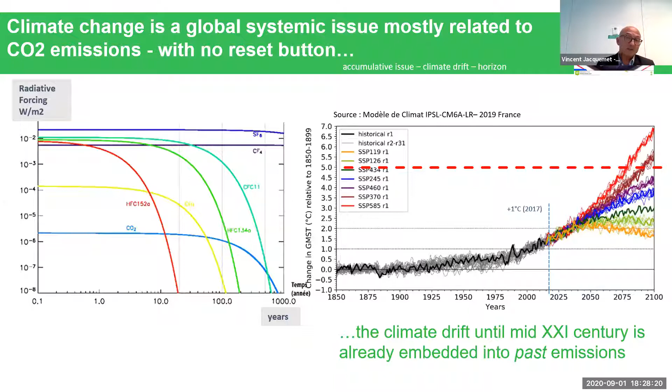When we commit on climate change, plus 1.5 degrees, plus 2 degrees, it's already a given. When you look at the different scenarios, shown on the right-hand side, most of them already converge to this temperature increase by 2040, 2050. This is the drama of the horizon: the actions we cannot take today. If we stop emissions today, we will only start to see benefits after decades. This is why it has taken a lot of time to increase global consciousness about this climate drift. But obviously COVID has accelerated this phenomenon.

Let's take a final look at the consequences of a few degrees more. On the left is a map of Europe about 20,000 years ago. As you can see, the sea level was 120 meters lower than it is today. That water was just stored in the form of an ice shelf on top of Scandinavia and Scotland, a 3,000 meter thick ice shelf. There was no temperate climate at all in Europe.

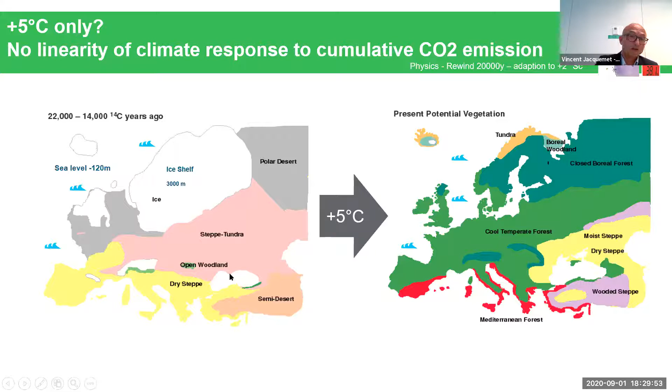So you can imagine what that represents, and this happened over 20,000 years. Just imagine if we get a few degrees more in just 100 years. This is a massive, massive change, a massive impact. It is commonly agreed today that a change above plus 2 degrees during the century would be something very hard to manage from an adaptation standpoint, for our social systems, economic systems, for our companies, and for us and our people.

So I'll stop here, just saying that this energy climate challenge has been taken very seriously by our company, Schneider Electric. For years we have been taking commitments, reporting on our sustainability strategy and the improvements we make.

Just a few words in a nutshell: we are a big global company, doing about 27 billion in revenues last year, plus 40% in different new and emerging economies. We're more than 100,000 people, and we have mainly two businesses. The first refers to energy management systems, and the second is about industrial automation and industrial software as well.

As I was saying, we are taking very serious commitments on sustainability. We have engaged actions to be neutral in our operations on scope 1 and 2 by 2030, and we have taken the commitment to have a net zero CO2 supply chain by 2050.

So our mission, basically, for our oil and gas clients is to help them in this transition towards more sustainable operations. How do we do this? We do this with our EcoStruxure set of offerings for oil and gas, comprising 3 levels, from the connected product to the edge control systems, and the applications and software.

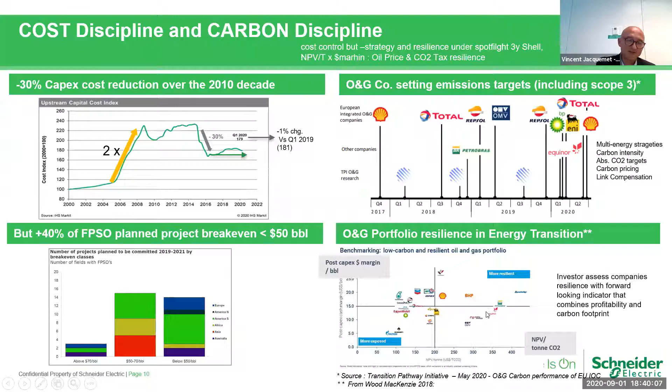Energy transition: so what's happening basically today? The major oil and gas companies are engaging into two main transitions: one is going for greener businesses, and the second for greener operations. Just for illustration, on greener businesses, very recently BP announced that they would engage investments to reach 40% of their business into new energies, and they will drive their capex towards those new energies.

Greener operations, we talk mainly about scope 1 and 2 GHG emissions, and this is very much consistent with SDG number 13 around climate action. So how are those companies going to undertake those two transitions? By putting together different initiatives in terms of decarbonization, energy efficiency, and electrification. Most of these technologies exist at different stages of maturity, but the good thing is many of them already exist.

Today, I will really focus on those scope 1 and 2 emissions, dealing with how we can optimize the designs, how we can improve energy efficiency during the operations, and we'll deal with the digital aspect of it. Because actually, it's like the challenge in digital transformation. Technology is one thing, but the transformation is another challenge.

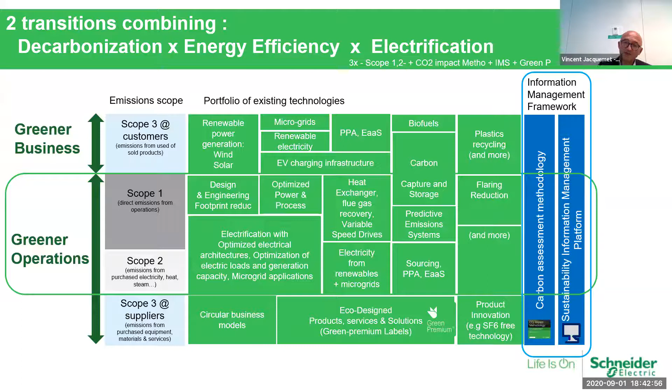And we can tell our customers, hey, look, by utilizing our technologies, you'll make that kind of savings. You have a footprint by using it, obviously, but you'll make those savings. And the second pillar of this information management framework is obviously the platform, the data and the information platform that is needed to make it.

Just a word on electrification. So most of us know that Norway is kind of a benchmark when it comes to CO2 intensity, in terms of kilograms of CO2 by barrel on the offshore. Norway is that benchmark with 7 kilos by barrel on average.

But it comes from a long history, actually. In Norway, flaring was banned in the 70s. A carbon tax scheme has been implemented in the early 90s, and Norway has already engaged programs such that 50% of its production is set to run on power from the shore.

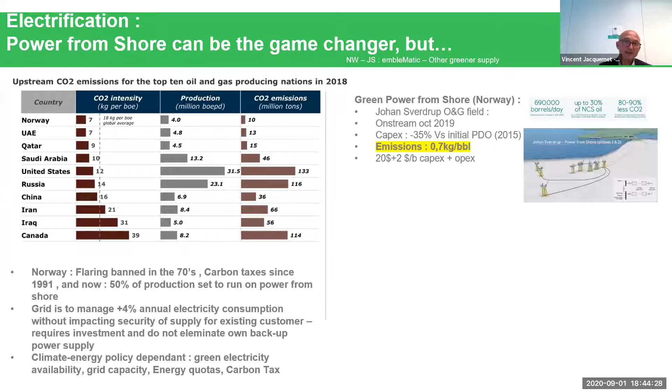And here we have a kind of emblematic example with the Johan Sverdrup offshore field, which is powered from the shore. And today the emissions are less than 1 kilogram per barrel, with quite low costs on the capex cycle and the opex cycle, as you could see. So at the end of the day, bottom line, they have reduced emissions by 80 to 90% in this field.

But there are other ways to electrify and to reduce emissions in the field. Another way, again it is in Norway, is to mention the wind farm that has been decided and implemented, and that should come on stream in 2022, I think, and which will power different platforms in the North Sea, but only meeting a third of the energy needs of those platforms.

So it will complement the operations in terms of energy supply, but still will reduce emissions and will reduce actually the tax burden attached to those emissions as well. So that's a very good deal, both from a business perspective and from an environment perspective.

Another way to reduce emissions, while looking at getting some economies of scale in the energy we're using, is to create floating concentrated power hubs. So studies have been made in Brazil, and they seem quite promising, showing economies in the range of 25 to 30% in terms of CO2 emission reduction.

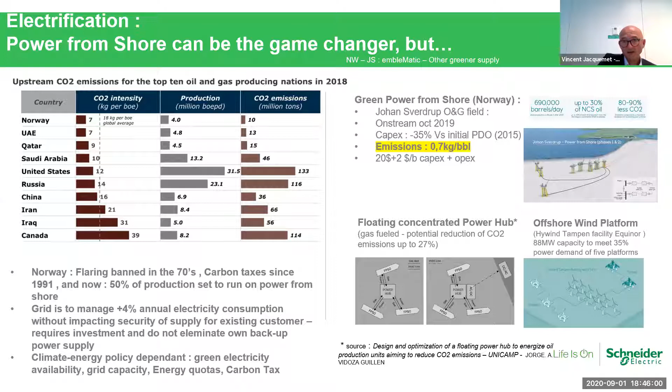So that was for electrification. Another set of initiatives is around energy efficiency. Here, I'm going to talk about variable speed drives, quite basic, very well-known technology today, and just a basic kind of application to drive energy efficiency, energy savings, CO2 emissions savings as well in the operation.

We know that technology, I think the point is to say that by implementing drives, you also put in place the system that will allow you to collect some data that will give you better control and better management of your operations. So there is also a kind of digital advantage in implementing this, because you get better informed on your operations and you can start engaging into kind of predictive maintenance applications by having these functionalities.

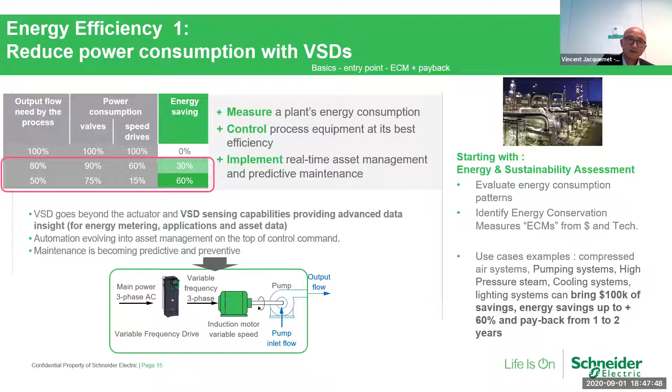And to start with, we have that experience. One of our divisions is engaged in energy and sustainability services. So you do some audit, you identify the most valuable energy conservation measures, and you implement. What's interesting is you usually have very short paybacks, around 1 to 2 years, and you can save hundreds of thousands of dollars and reduce energy up to 60% plus, depending obviously on the use case. So that's one of the basics in terms of efficiency.

Another one, quite well known, and I think this deserves more attention, especially as it allows to rethink the designs and the power architectures of our FPSOs and upstream assets, and to optimize them from design, by really considering energy architectures which are fit for purpose for the process and meet the process requirements, and really design the most effective power systems for the need of the processes.

So you do this by decreasing the voltage, by decreasing the short circuit currents. At the end of the day, we have been able to demonstrate that savings can be up to 45% in terms of size, in terms of footprint of the electrical system, and we can reduce its cost by 20% and reduce the subsequent emissions, obviously, of the system.

So the point is, you need to engage this very early, obviously, when starting the very early design engineering studies of your project, and it has to be collaborative. I mean, and this is the way we want to engage with our customers.

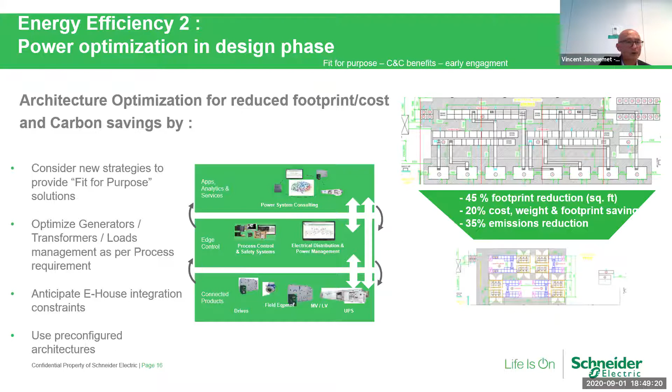Another initiative in terms of energy efficiency is to put together the view of the different disciplines on your operations. This picture shows the control panel for a plant where you have together the process information, the energy information, and the asset management information, so that whatever happens in your operations, you can directly access the equipment and the process data. You can run some simulation, and at the end of the day, prevent any downgrades or failures.

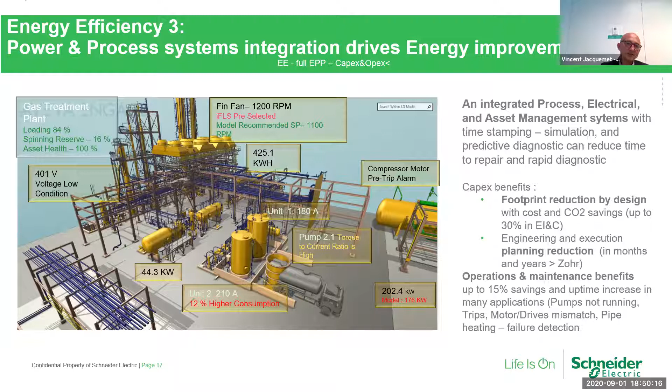And have then a better control of your operations. At the same time, by putting those two systems together, you'll find some savings when designing the solution, and you'll find savings while in operations as well. So that's it for the energy efficiency solutions I wanted to share with you.

I'll move to the next topic, which is about digital and the digital transformation. I found this quote from Bill Gates, and the point is to say it's really about questioning ourselves what drives the value in our operations. Digitalization in that perspective is only the means.

What's valuable is the information, and what makes you different from another one is the way you manage that information. So information is really at the heart of the value we are extracting from our businesses. We know that, but I make the point because many times, over their digital transformation journeys, companies have maybe not put enough effort, time, resources, or thought into what it was they wanted to achieve. So the point is, how do you make all that information useful, actionable? And that's the journey we have to start.

We have to start in each and every business we have, because there are so many data everywhere, different data formats, structures, volumes. We have to make sense of that data, put it into context, make it consistent in the way we relate it to each other in terms of the objectives it serves, and the way it is managed in the operations through different processes we have.

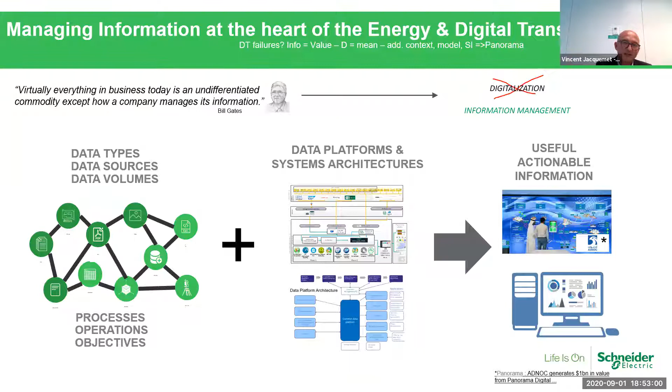I pasted a picture about the ADNOC Panorama Command Center, which is one of the most exciting experiences we've had with our customers. I really encourage you to have a look at what they said recently in terms of how they are benefiting from having set up this information system, and today how they can leverage it to improve their operations.

And as we were talking about sustainability and digital, that's exactly about the same. The point is, we have to build trust towards our environment and toward the investors on what we are doing. So they have to trust our reports. Our reports have to rely on standard, recognized methodologies and indicators, because our strategies are under more and more scrutiny.

As I said before, you have organizations like the Transition Pathway Initiative, which benchmarks the commitments taken by our oil and gas companies and makes recommendations on that. Then you have to work all the way back, looking at: what are our commitments? How should I report on those commitments? What are the tools I need to manage my energy and sustainability commitments in the different use cases?

I have to produce my reporting. I have to increase my energy efficiency. I have to better purchase or manage my energy across my different sites. I have to identify those energy conservation measures that will help me. So where is all that data?

That data is in different systems, some of it manual. So you have to organize and orchestrate the entire collection of that data to make sure you will really be able to leverage all that data and information and make it useful for the purpose of validating and improving your sustainability strategy.

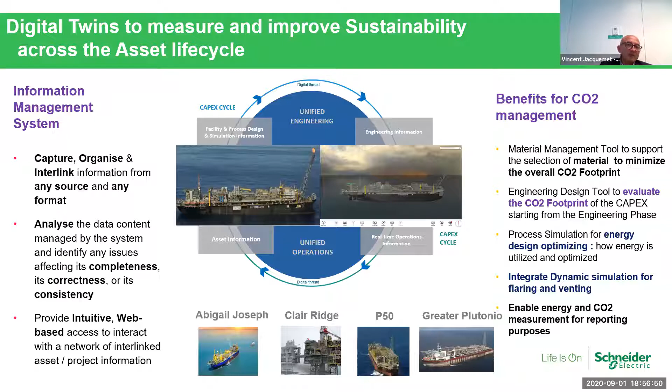So that's really digitally enabling your sustainability strategy across the life cycle of your assets. I want to take an example, like we commented on last year. It was just the beginning of this FPSO digital twin in South America with Petrobras.

So they built the digital 3D model on the topside for three key processes, and then started to implement advanced cases in terms of predictive maintenance, in terms of connecting the workers and supporting them with technology during the maintenance operations. And this phase 1 has been completed.

And there were some interesting key learnings that were reported by Petrobras on this digital twin experience. They recognized that there wasn't a huge upfront investment required to start building this digital twin. Also, it was a significant piece of work to collect the different engineering data about the FPSO, and this is a common thing.

While starting those digital twin initiatives, at the end of the day there is some investment needed to put the data together. Having in mind that laser scanning can be leveraged to complement those pieces of data, that's one thing as well.

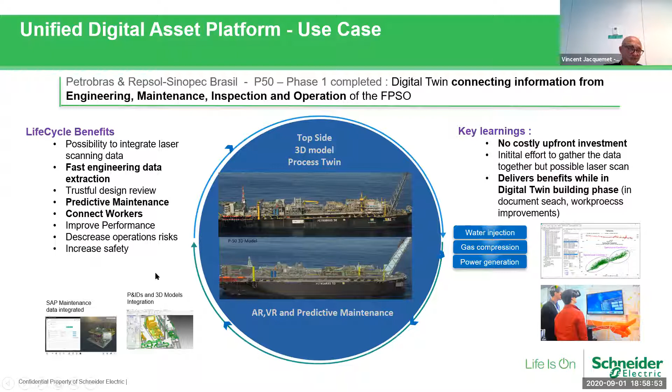Another digital initiative I want to mention is about Vincent—we're running out of time. That's my last slide, Dave. Okay, okay, thank you.

This is an initiative we launched with AVEVA and Doris Engineering last year. We started last year and launched it this year to accelerate the digital twin within the market. We already started to work and have identified different use cases we want to bring to the market.

And this is an answer to one of the conclusions of the FPSO Congress last year. I think everybody recognizes that more collaboration is needed, and this is a way for us to engage into it. We're happy to discuss this.

So I will conclude then, Dave. I think in the previous presentation we had the question, how far and how fast are we going into this digital transformation? Frankly speaking, I don't know. I think maturity is globally increasing, but it's very hard to say.

What is for sure is that for sustainability, we have to accelerate now, and we have to deliver now. Electrification sets a very interesting benchmark for the industry. We're seeing the example in Norway. There are existing energy carbon efficiency measures from existing technologies and expertise in terms of optimization of the power and process design that can be leveraged very early on the project, and that can even be implemented while redesigning assets.

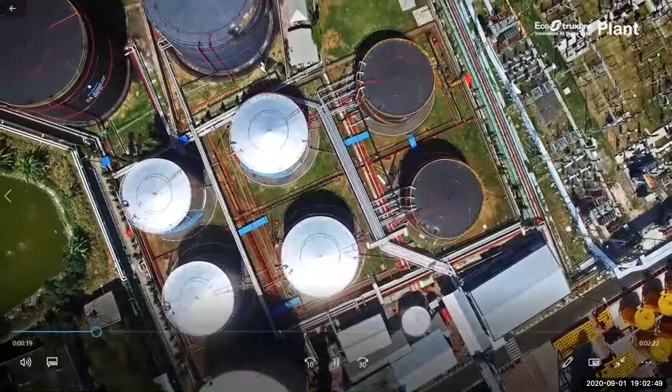Any shutdown in operations could impact production output. Unplanned downtime at a strategic production facility could create a serious flow-on effect with a major economic impact. Or worse, an incident could also come at devastating human and environmental cost. In this context, managing a plant has never been more demanding.

Managing operational risks with confidence is key to ensuring greater safety of people, production, and profit. EcoStruxure Plant, Schneider Electric's open IoT-enabled architecture, makes the job easier. It helps drive measurable operational profitability improvements safely. Using analytics and Schneider Electric's real-time accounting approach, EcoStruxure Plant helps you control and measure risks in real time, automatically or manually, and provides your employees with tools that empower them to become performance managers.

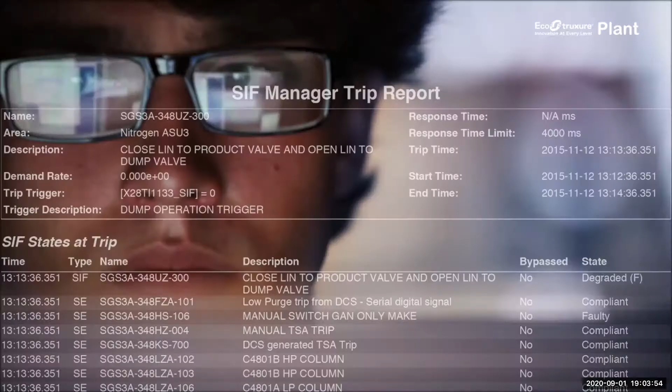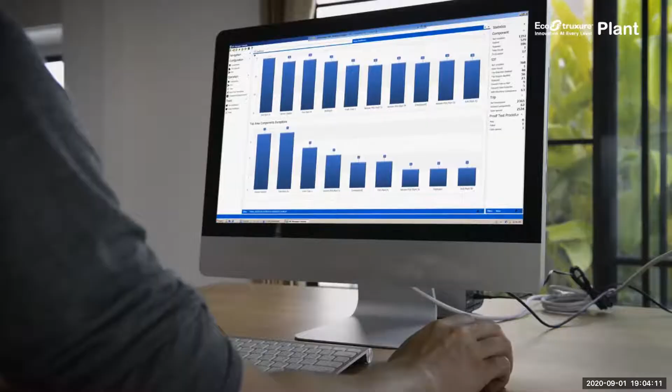For example, EcoStruxure Triconex safety systems automatically send your maintenance manager easy-to-understand alerts through their Safety Instrumented Functions Manager software. These alerts include possible causes and solutions to abnormal conditions, so issues are addressed before an incident occurs.

These and other tools provided by EcoStruxure Plant help your workforce understand the impact of their decisions on overall efficiency, reliability, and safety risks, which helps you make your operations more efficient, more reliable, safer, and more profitable.

With connected products, edge control, and apps, analytics, and services, EcoStruxure Plant enables the scalable design and operation of connected systems with best-in-class cybersecurity built in at each layer. That's innovation at every level.

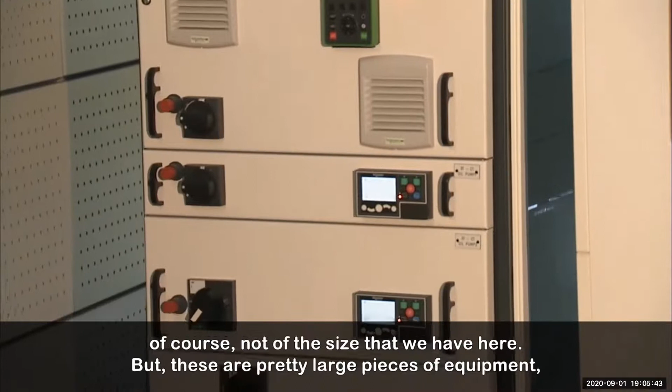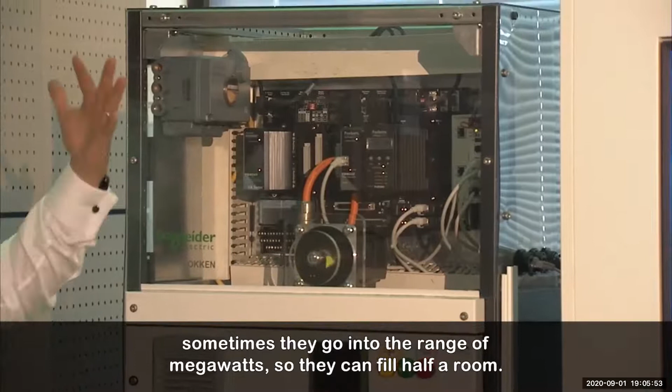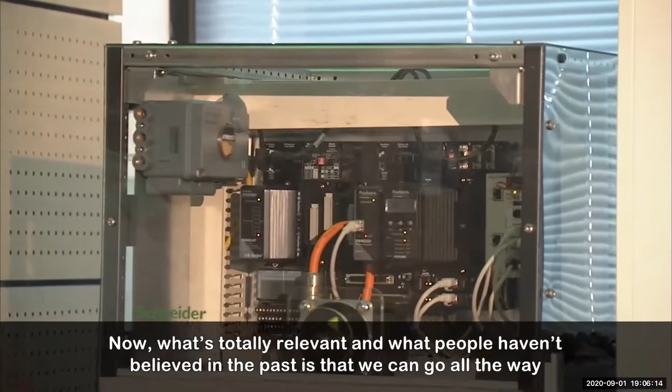And they are, of course, connected to the DCS system that you see up here, which may be in the same or maybe in an adjacent room. Now, what's totally relevant, and what people haven't believed in the past, is that we can go all the way from the electrical equipment and the motors into the DCS system. And the DCS system you would see in the control room here, and that's where the people operate the plant.

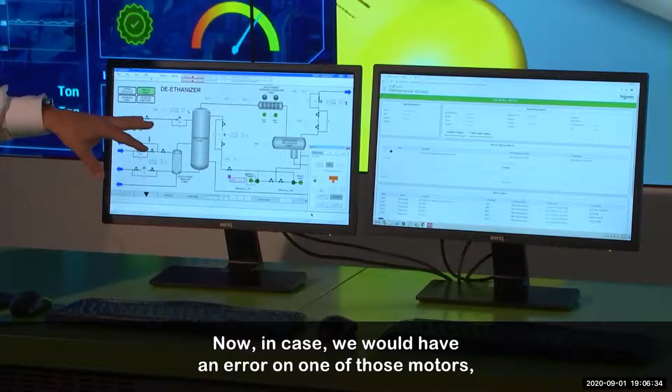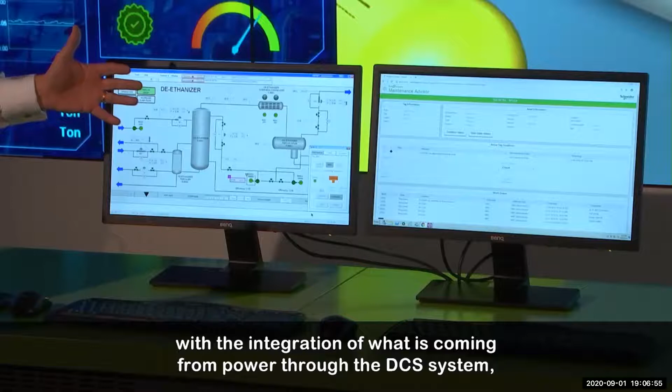Now, in case we would have an error on one of those motors, then usually this is where the panic breaks out and people want to make sure that they keep the plant under control. And this has been extremely simplified with the integration, coming from power through the DCS system or the process control system now to the software, because if they look at the error here, they can see the error is at a pump. And then one could immediately look at the 3D model of the plant, and that's where AVEVA comes in.

Yeah, and so we're in a de-ethanizer. We're in a pump that's involved in the flow of the feedstock into and out of that de-ethanizer. And so now we want to go from this operational view. We know there's a problem with the pump. So now look at how that looks from the capital view.

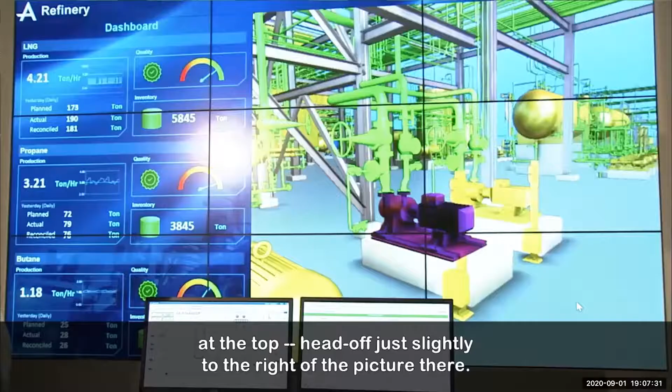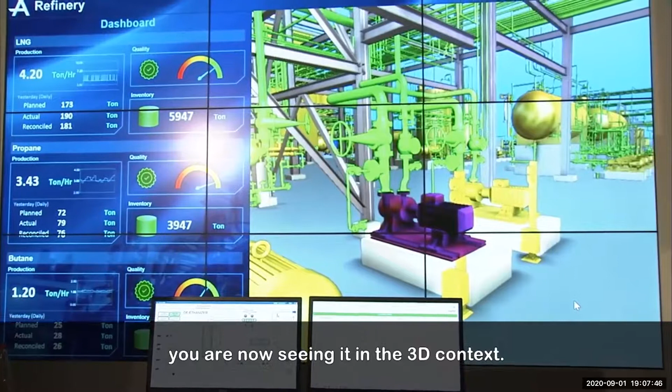So maybe if we can just look to the 3D display at the top, ahead and slightly to the right of the picture there, you'll see this 3D view, and that is the asset view. You're now looking at that same pump that you saw in a 2D schematic. You're now seeing it in the context of the electrical control system, in the 3D context. So now you're able to switch from the operational view to the design view, which would be really important if now you needed to do something with that pump to correct it.

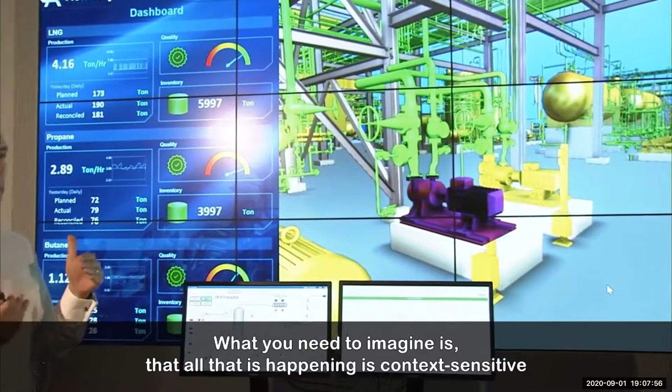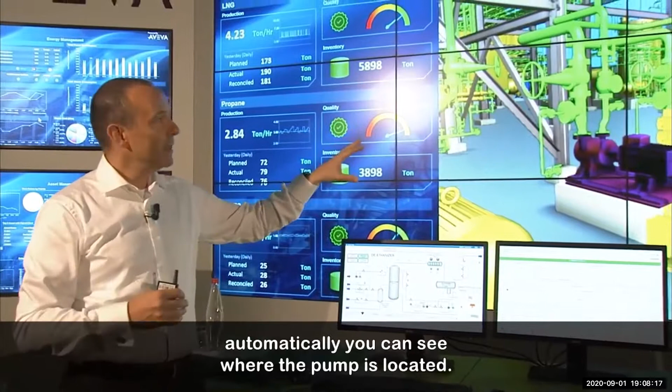And what you need to imagine is that this is all happening context sensitive, and that's the change from the past, and that's the clear advantage of being totally integrated. So on the process control system, you go with your cursor to the pump, and then on the 3D model, automatically you can see where that pump is located. Now you see that in such a plant you would have a certain redundancy.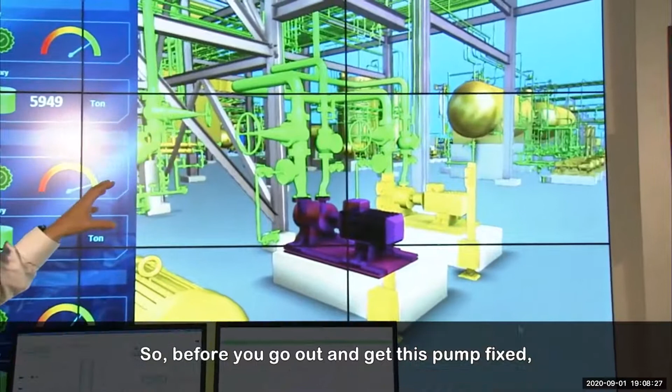That means if one pump fails, you have another pump there. So before you go out and get this pump fixed, you want to understand what's the performance of the second pump. Is that going to be potentially failing in the future? And that's where you would call, in a larger plant, the so-called reliability center.

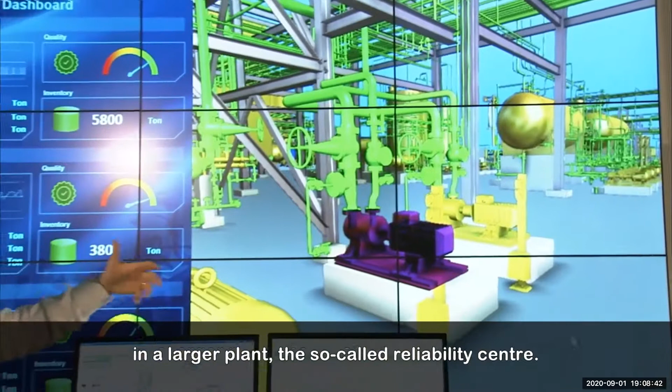In the reliability center, we have quite a bit of AVEVA software running, for example our asset performance management suite of products. Craig will explain what we can do with that.

So this idea of asset performance management - when you have downtime, it's okay as long as it was planned. You don't want it to be unplanned, that's very expensive. So in this situation, we know there's a pump, we know it has an issue, and we're about to switch over to a second pump.

Now, of course, we want to look at the information around that second pump to be sure it's going to be reliable. It turns out we've been capturing all the operational data of that pump over a long period of time, and based on that we can predict when it would fail or not fail in the future using artificial intelligence and machine learning. So we're able to look at that before we actually activate the switchover to the backup.

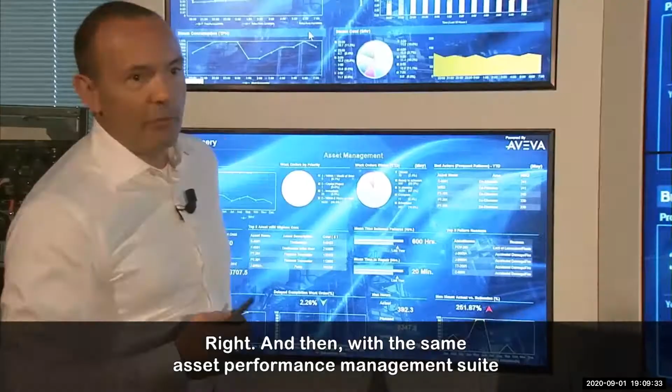Right, and then with the same asset performance management suite, you would actually send out the service engineer. He will get his work order, he will look at his mobile device, and he will have all the data plus the 3D model, everything on his mobile device as he does the service on site.

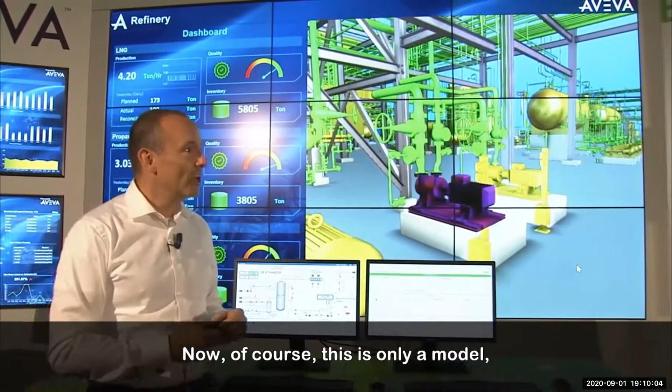Now, what you also could do prior or after the service, you can calculate with our profit advisor automatically what's the profit impact for the company or for the plant. Now, I understand, of course, this is only a model, so let's see how that could look like at the customer side.

We've talked before about Abu Dhabi National Oil Company, or ADNOC, and we've talked before about how in 8 weeks we were able to deliver Schneider Electric and AVEVA software together. Can we have the slide?

So they're very proud of it, and we're very proud of it. This formed what ADNOC now calls Oil and Gas 4.0, as part of their digital transformation.

Now, I want to come back to - the customer says, well, this is great, now how can I drive productivity improvement? We've gone in with that account team, that coverage model we described earlier, and we worked with them around two scenarios. First, asset performance management, which we just talked about - looking at a certain asset class, predicting when it's going to fail before it fails, a dramatic improvement in productivity.

And secondly is optimizing the feedstock - looking at the sulfur content of oil coming out of the ground, optimizing where that gets routed to the refinery capacity, to the storage facility, to the vessels at sea, to the spot market prices. Every optimization in this end-to-end point, by ADNOC's words, is over $50 million of economic value generated. And we're just getting started with ADNOC.

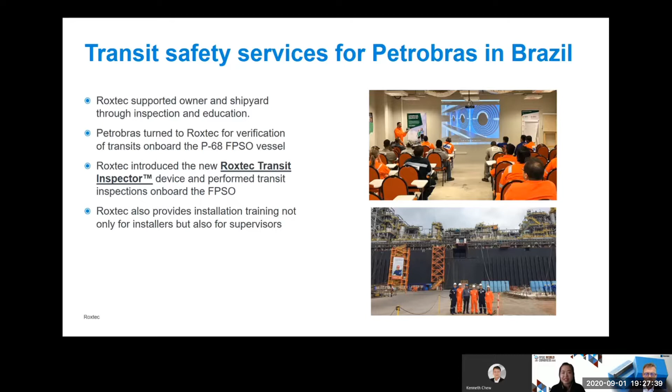Thank you, Morten. And if I can just ask you to summarize your thoughts about Roxtec in general and how you guys can actually help the FPSO industry, what will your thoughts be?

Of course. So as a summary, as mentioned, we believe that a digital protocol that complies and supports throughout life is very key. And I think we've proven that during the COVID-19 pandemic, that it is basically key to have something that operates no matter what is happening around you, your surroundings. And then obviously the innovation, not only products, but systems as a whole - we definitely need to take this to the next level of electrical safety, so to speak.

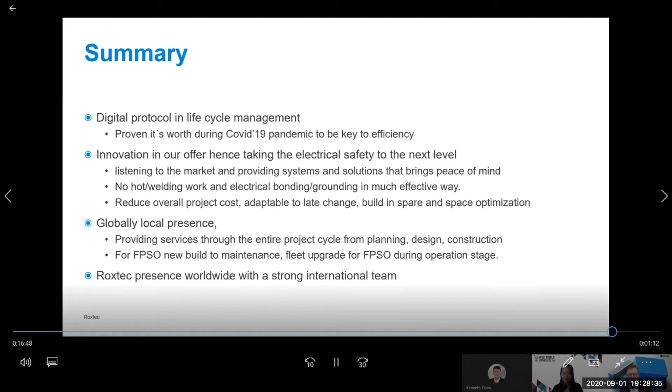Globally, local presence, as we call it - we can have any contact in Brazil that will convey to a question in Kuala Lumpur, and eventually having a guy on site at the yard in China. That's daily business for us, and that's how we support FPSO owners on a daily, regular basis. So I would say that kind of summarizes it - having the worldwide presence, being knowledgeable, being digital and innovative.

Back to you, Jamie. I hope. Thank you. Yes, definitely. Thank you very much, Morten.